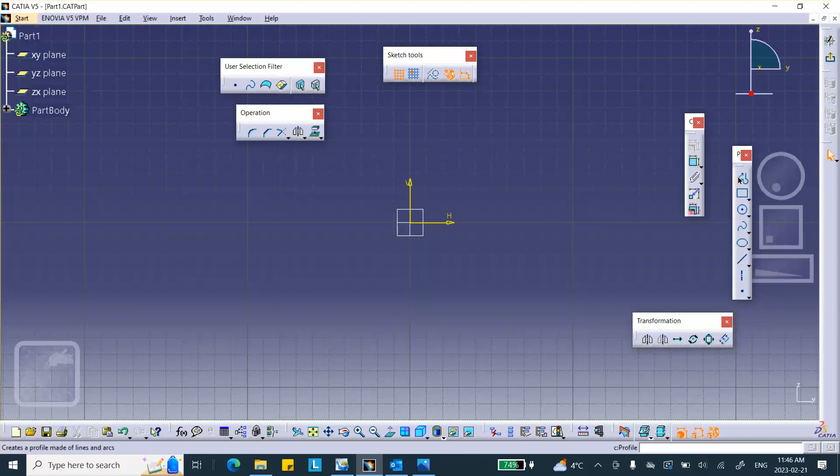So on this vertical plane, I will sketch the profile that I just showed you. I'm going to draw something and then clean it up like that. There we are. I'm going to make it symmetric, so the left line controls the right line, controlled by the middle axis - we're going to make it symmetric. And once you do that, be very careful making sure that these things are tangent, etc. That's all we need.

Notice that you can move this thing. Oops, control Z. Okay, so let me see now. I can make this, controlled by the middle axis, also symmetric. Okay, let's see if it's working now. Yep, you can see that.

Very good, let's dimension these things. The distance from here to here is 140 millimeters. So I'm going to change this to 140 mm, which is roughly 5.5 inches. And this radius is 20 millimeters. All right, and that's pretty much it.

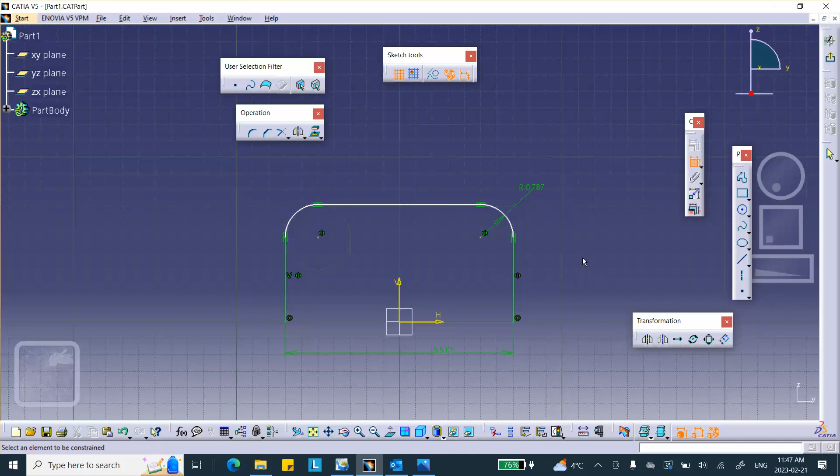Oh, this height - I forgot the height. I remember what the height was, 30 millimeters. Okay, so you see this for a second? Yeah, this height is 30 millimeters. 30 mm, good, exit. Let's check this thing, make sure it was actually 30 millimeters. 30 mm, yeah, I guess it was.

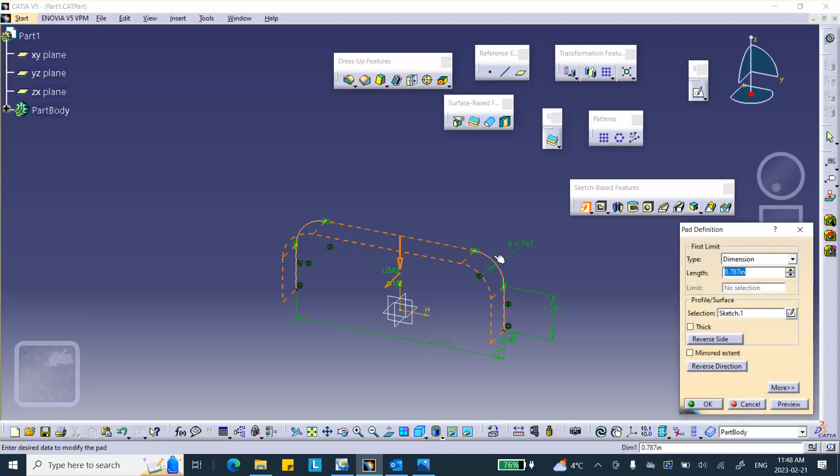All right, so we're going to extrude that, and I'm going to use it in both directions. Oh, I'm sorry, cancel that - I completely forgot that I'm going to create a surface, so it cannot be in part design.

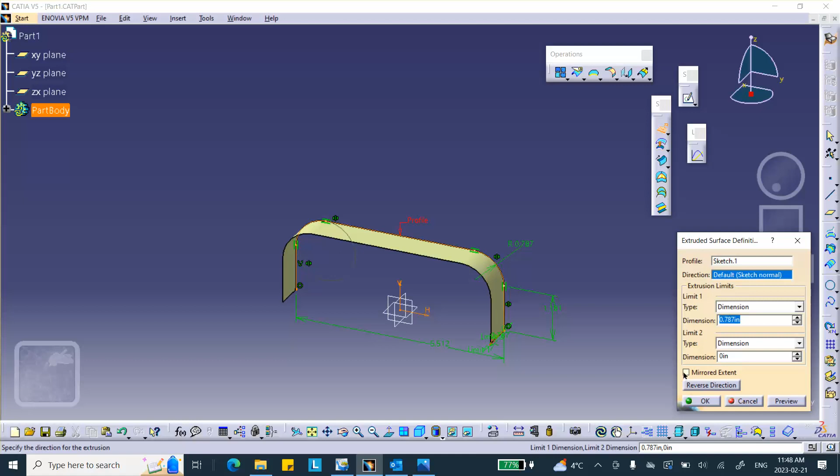So you're going to have to go to, for example, generative shape design. Yeah, so we have a profile there, and we're going to extrude this right there, in both directions, each direction being 50 millimeters, which means a total of 100 millimeters.

Now, on that face, I will sketch a circle of radius - I think the radius of that circle was 10 millimeters. So let's dimension this, 10 mm. That's right, 10 - oh, this diameter, so radius 10 mm.

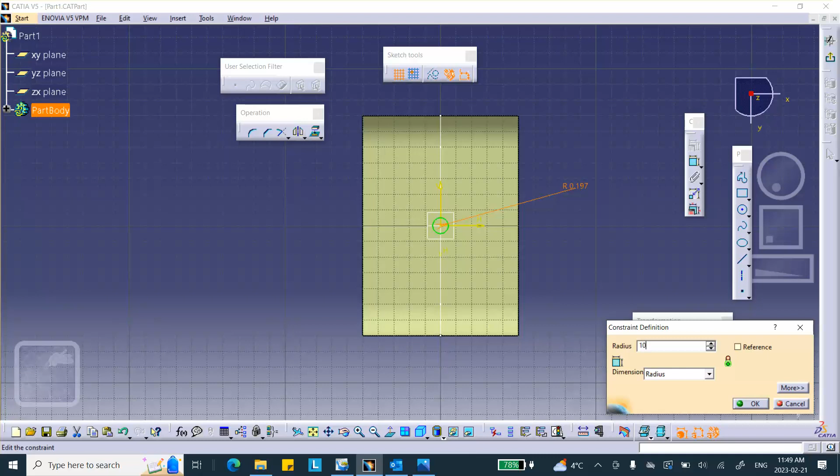Good, exit. Now I'm going to get the saw here - see that split right there, right next to joint? I don't have to join anything because of the way I did it when you extrude it. When you extrude it, it's all going to be one surface. So when I put a thickness on it, the whole thing is going to take it, and when I mesh it, the whole thing is going to get meshed, etc. So I'm going to split this.

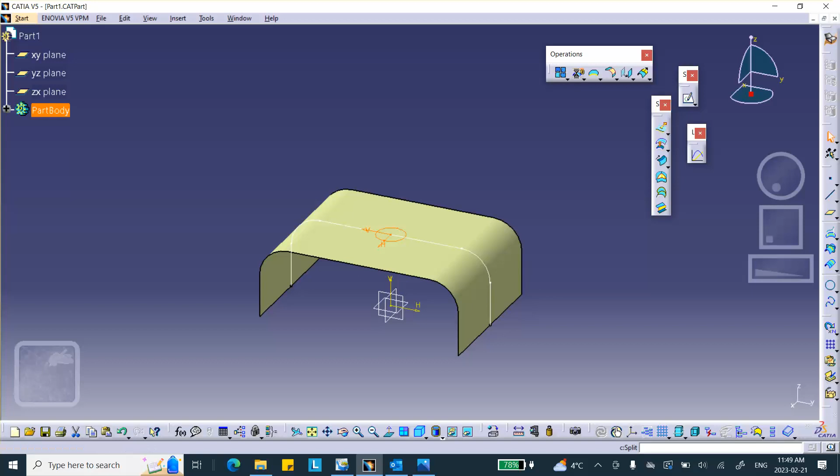Read this thing carefully - it says element to cut, sketch 2. That's wrong, that's because it was highlighted. See that? It's picked, don't do it. Click, left click so it's not highlighted, then split. Element to cut is that surface, cutting element is that circle. And then I'm going to cut it the other two directions.

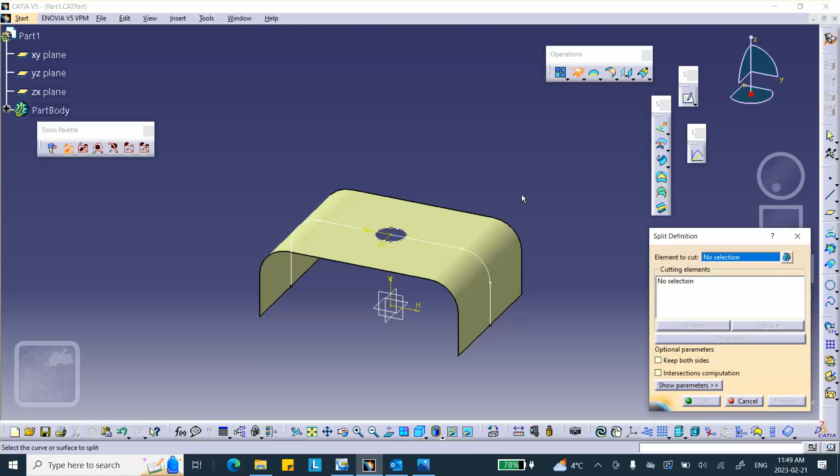So split. Once again, the element to cut is the surface, cutting element a vertical plane, and it doesn't matter which side you keep. And then again, split—this is the element to cut. Cutting element is this vertical surface, and there we are. So this is what we have.

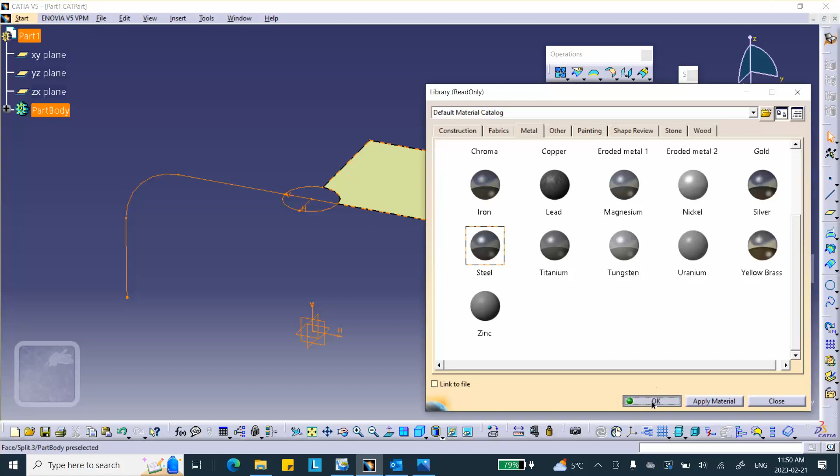Let's apply some material on it, metal. Let's make it out of steel on that surface. Okay, and let's save everything.

Now we're going to switch to a generative structural analysis because I don't want to do a fancy mesh here. This is just a regular three-noded triangular element that will do the job. Now notice that because I have not created any solid object, there's nothing meshed here—you have to do that yourself.

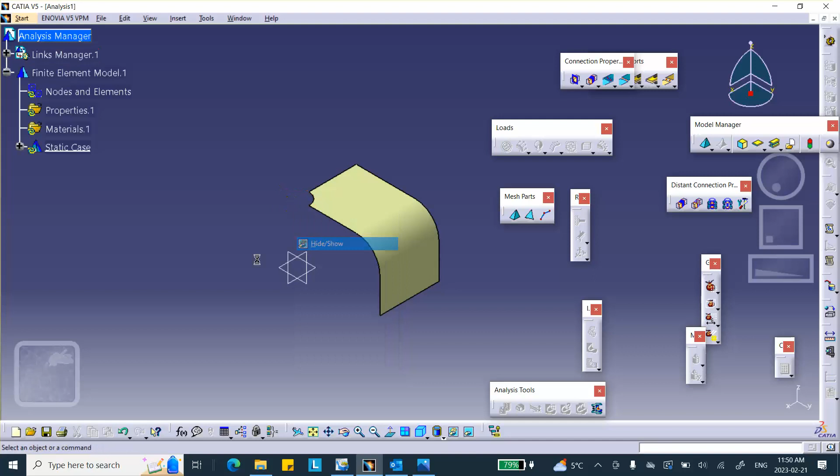Anything that's bothering you, you can actually hide it. So that sketch I can hide, that sketch I can hide, etc. Now I'm going to use a triangular element right there—see that on that surface?

Yeah, parabolic, that's okay. So for the size, if you want to look at the mesh, you put the cursor there, right click, mesh visualization. There we are. You can make it smaller, you can make it bigger, whatever you wish.

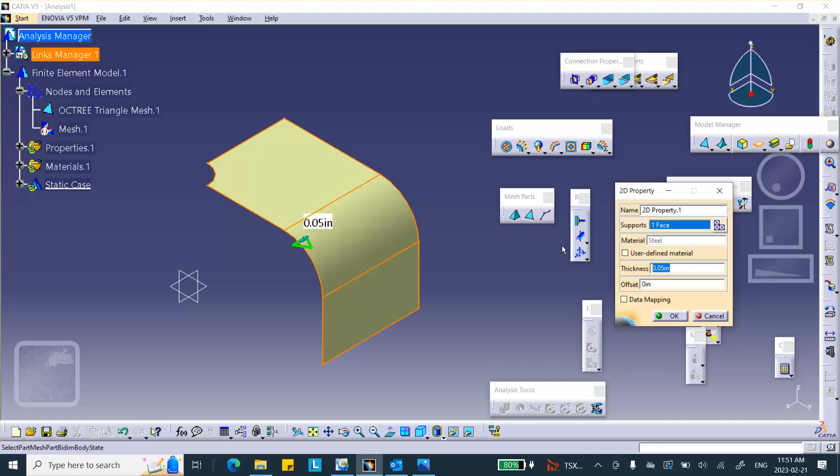Right click, deactivate. Now, let's give it a thickness. So 2D property—there's the 2D property in model manager, where the traffic light is, 2D property. You select it, and whatever thickness you put in there, it's going to take it for the entire thing. If these were not talking to each other and you did not join them, then you can individually specify surface thicknesses. So this is, I think it says 2 millimeters, right? 2 millimeters, right? Good. We're pretty much done here.

This bottom is clamped. Now notice that these three edges are in the plane of symmetry, in the YZ plane of symmetry. So this edge and that edge and that edge are in the YZ plane of symmetry. YZ plane of symmetry means that there is no translation in X, and rotation is exactly the opposite.

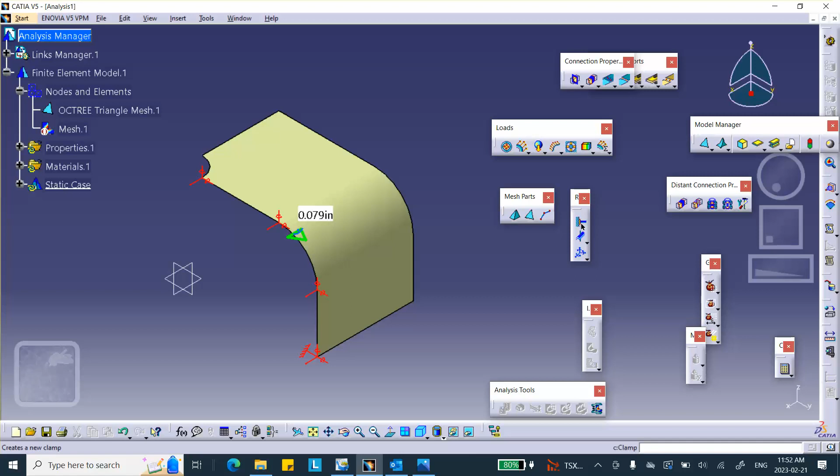Good. And the other edge—let's uncheck all of these so that we don't inadvertently make a mistake. This edge lies in the XZ plane of symmetry, so no displacement in Y. Rotation is exactly opposite. So this takes care of symmetry, but I also want to take that circular edge and push it down by some amount.

Remember, in CATIA, if you want to push this thing down by some amount, first you have to give that amount to be 0, and then you can change it. So in this case, I'm going to use user-defined.

This edge, this circular edge, I want to push it down, meaning the Z direction. So first I have to make it 0. And once you make it 0, you can go change it. This is the last restraint, yeah.

In predefined, what is that? The enforced displacement. Under the load section, enforced displacement, you select that last restraint and you want to push it down by -2 or -1 millimeter. -1 millimeter.

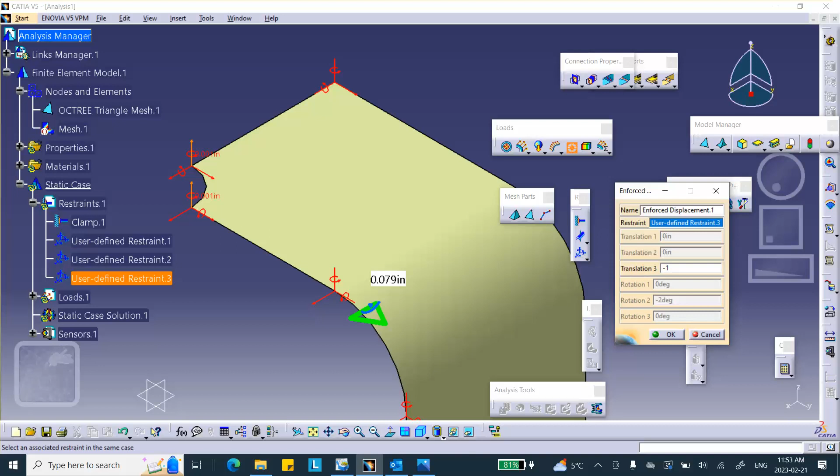Okay, that takes care of it. Let's save the analysis—file, save management, analysis, save as in that same folder, which was called homework 5 problem 1.

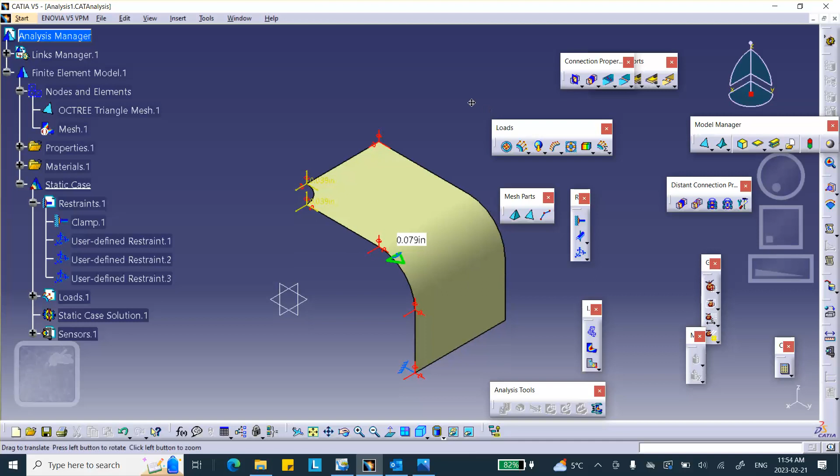And then we're going to run it and let's see what happens. Okay, deflection looks like that. This is what I expect.

Yeah. If you want to see, for example, von Mises stress, you do it and then you change the rendering to material shading. This tells you that the mesh is not very good here. Obviously, look at the patchiness here—this is a terrible mesh, obviously.

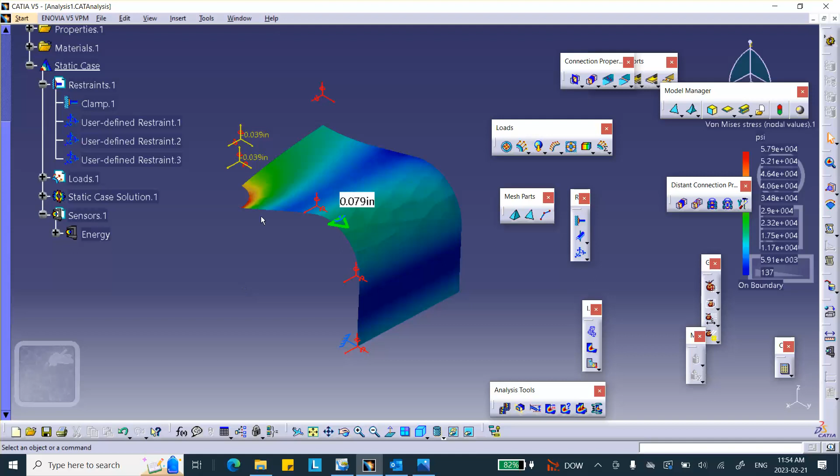Now I'll leave it like that because we're not going to do mesh convergence. In the absence of a mesh convergence study, none of these numbers can be trusted. These things are totally useless. You have to do a mesh convergence study to make sure that this whole thing makes sense.

Now, if you want to know how much force is needed to push down, put the cursor on sensor, right click, go down here, reaction sensor, and select that restraint that you used to push it down, and update. Now notice that you could have also selected this clamp, the bottom clamp, because the force needed to push this thing down is essentially the force needed on the clamp, because they balance each other out.

Now, the number that you have to write, if you were asked to give the force needed to push that circle down, the entire circle down, is 4 times that, roughly 160, almost 162 pound-force. And of course, you can convert your units to newtons, etc. So don't forget to multiply this thing by 4 if you want to know how much force is needed to push this thing down. And that takes care of this homework.

Let me save this thing and stop that.